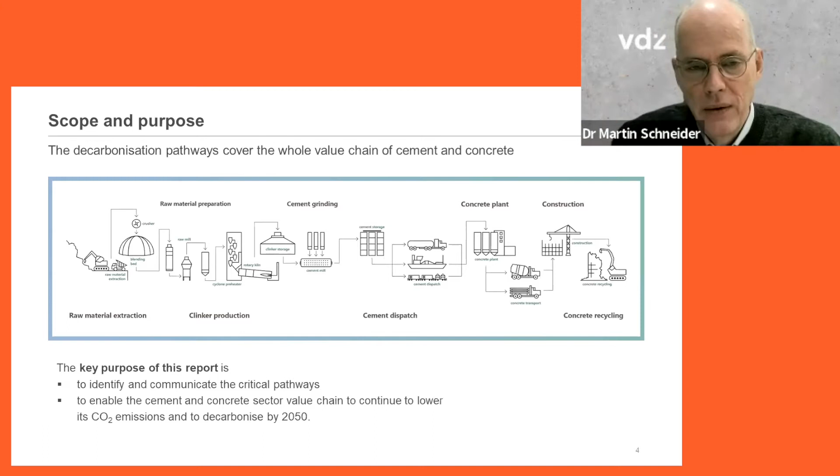Nevertheless, you might know that we have also been participants and responsible for the numerics of the global roadmap for the global cement and concrete sector. The measures are all, of course, somehow similar. But as you will see, the implementation, like in your case here in Australia, is very, very specific to your situation. That is the reason why we were assigned, or asked, to deliver this report, which of course we did with great pleasure, I have to say.

Now we have the full value chain here, and you will see that the decarbonization pathways cover the whole value chain. Of course, we start in cement and clinker production, but also the question of cement grinding, and how much clinker can be in cement in future, in order to make cements as CO2 efficient as possible. And the same is for concrete. The question is how much of the SCMs, like fly ash, slag, or limestone, or in the future calcined clay, can be in concrete to make concrete as CO2 efficient as possible.

And of course—this is, I think, a focus that SmartCrete also particularly covers—the question of how concrete can be used efficiently in construction for offices, buildings, housing, and infrastructure. And at the end, the question is how can concrete be recycled, and how in recycling, the effect of what we call recarbonization, the absorbing of CO2 by concrete, can also be taken into account. So this is the full value chain.

As I said before, it's the first time, I would say, in the history of our sector, the cement sector, that we are not able to deal with such a challenge as an industry alone. So we need to really cooperate along the value chain. And I have to say that the experience we had with the many workshops and video conferences we did, with all those involved in the value chain, really clearly showed there's a strong willingness to work together.

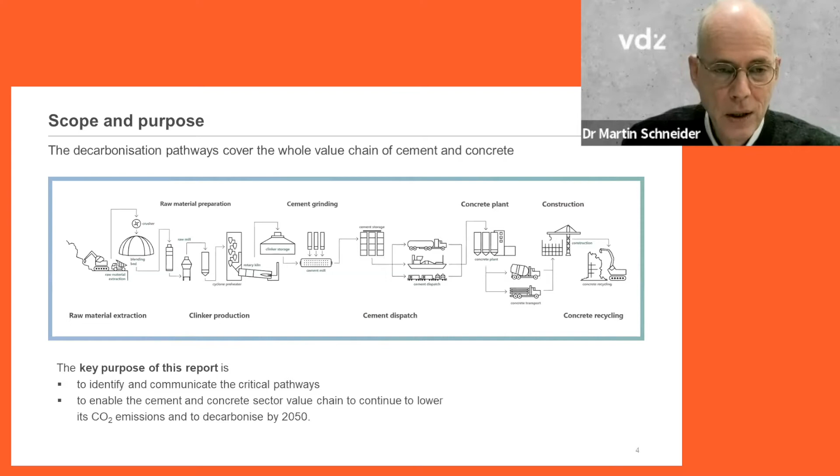And it's in our hands to make this future net zero when it comes to CO2. And you will see that it's possible once we all work together, on a global scale or in the regions where we are working.

Now let me draw your attention to the beginning of the value chain, which is cement production. Cement production is, of course, the source for the direct CO2 emissions, the embedded CO2 along the value chain.

As you all know, we have an issue in cement making which is different from many other industrial sectors, in particular different from the power sector. We need high temperatures to burn our limestone and clay into what is called clinker, and clinker is the powerhouse in cement.

Clinker is the main constituent in cement that gives strength to cement once it's hardened, and then to concrete. It's absolutely needed in cement. Now the fact is that clinker burning depends on raw materials, in particular limestone.

The recipe is fixed. There's no way to change it, for chemical reasons which are part of the mineralogy of clinker. From the limestone we have, and limestone is calcium carbonate, we have to extract the calcium oxide, and that releases CO2.

So we have two sources of CO2 from our clinker production: namely the process CO2, from the decarbonation of the limestone, and the CO2 from burning the fuels. Taking those two as such, you could roughly say it's a 2/3, 1/3 fraction.

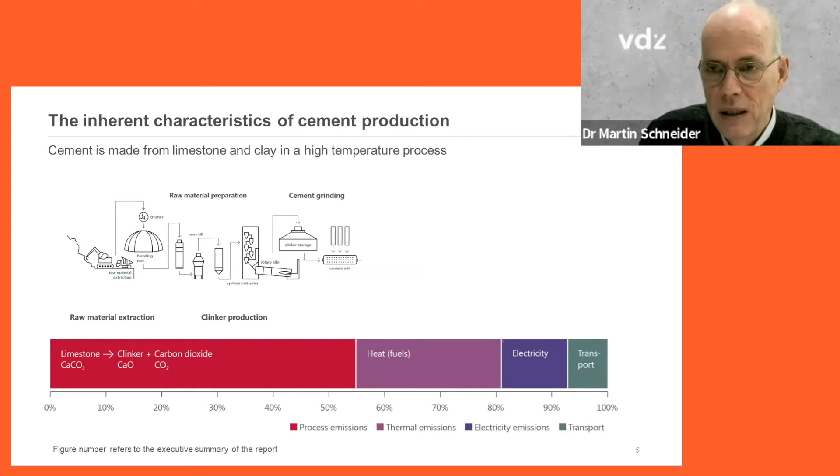Now, looking from an industry point of view, what are the key issues for success? There were very good discussions that we had here, and the question was always raised: how can we successfully transform the full value chain?

When you start from cement making and concrete making, and ask yourself what are the main levers, the main pathways, the first thing is to lower the clinker factor.

I think that's clear, based on the fact that clinker, as I said before at the very beginning of our value chain, is the origin of the direct emissions from the limestone and from the fuels. So the less clinker you have in cement, you could say the less CO2 is embedded in the subsequent part of the value chain, which is true.

On the other hand, there is always the question: how much clinker do I need in my cement? Cement without clinker is impossible. So these are two extremes, and the question is, what can be optimized?

It's not only the clinker factor in cement, but also the clinker factor in concrete. Australia has a long and very good tradition to using what we call supplementary cementitious materials, SCMs, materials that can substitute clinker.

Australia has a long track record and a very good tradition in using these SCMs in cement, but also in concrete. So the overall clinker factor, as we call it, is already quite good in the Australian cement and concrete sector. Nevertheless, there's always the question of how we can further optimize the clinker factor.

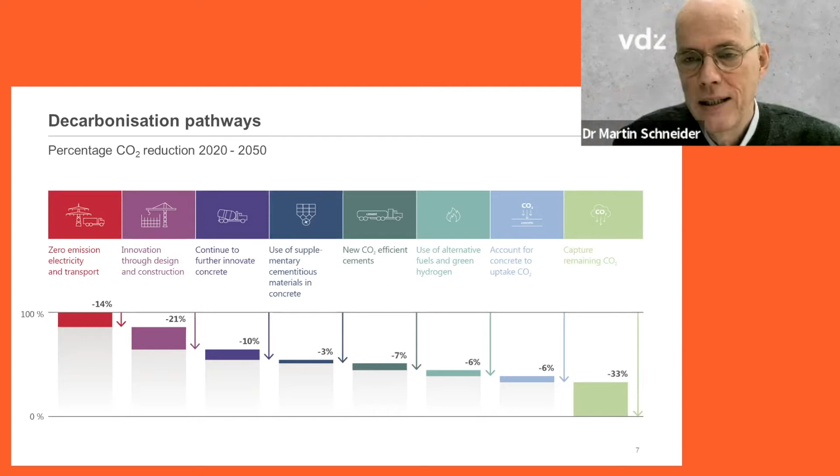But it's also the fact that concrete as such can be seen as a CO2 sink. And it was always a question to what degree concrete can absorb CO2. It's, of course, difficult - it depends on the type of concrete, it depends on its specific surface, and so on.

And it's interesting to see that quite a few research projects have been concluded, and even the IPCC, the Intergovernmental Panel on Climate Change under the United Nations framework, has addressed this. A substantial part of the original CO2 being emitted from the decarbonation of the limestone is reabsorbed at a later stage. And we might even - this is one of the innovation areas we suggest - be able to accelerate this, to enhance this recarbonation.

The question, of course, is how can that be taken into account when describing the CO2 from the overall value chain. Now, we have accounted here 20% of the original CO2 emission from the process, which is in agreement with the international approach on this pathway. Now, the remaining CO2 - and there will be remaining CO2 - the value chain will not be able to fully reach net zero by 2050 with the measures and pathways I've just described.

There is still the need to capture the remaining CO2. That means to capture the CO2 at the point of emission, at the stack of the cement plant. Then the question is what to do with the CO2. First, of course, you can store it - bring it back into depleted oil wells and gas fields. There's a long tradition also in your country, in the oil and gas sector - it's proven technology. The other thing is, is there anything we can do with the CO2 to reconvert it into something useful? We call it CCU, carbon capture and utilization.

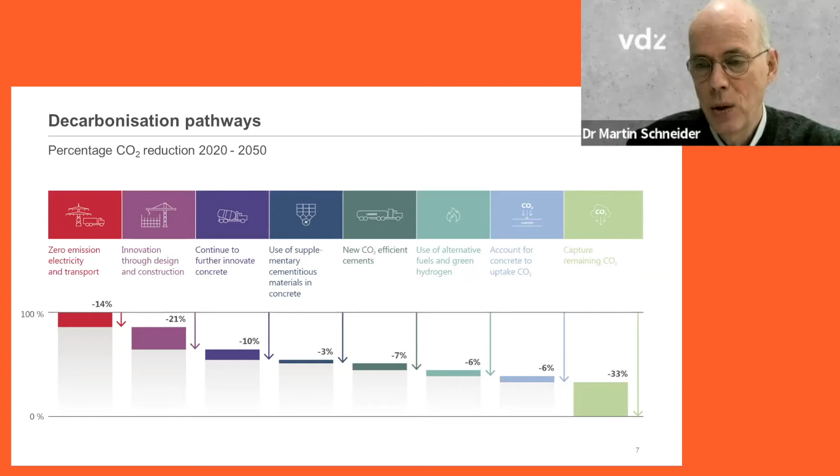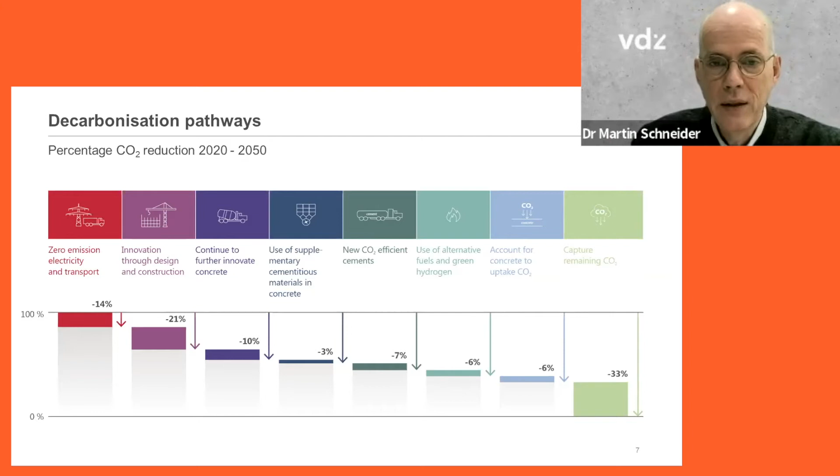As you may know, CO2 is a very stable molecule because it has released all its energy, as it's the end product of combustion, for example. So in order to make something useful out of it, you have to re-inject energy, you have to give energy back to it. And that, of course, has to be CO2-free energy.

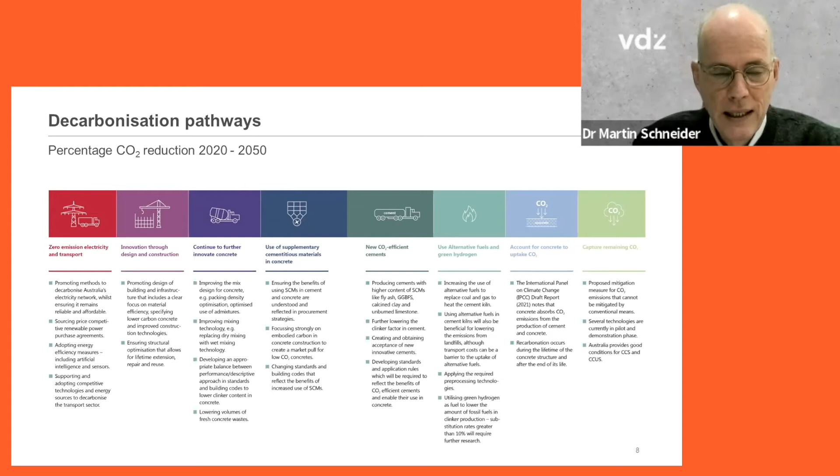This slide is not one I'm going to explain in detail, but it's a figure from the report which clearly shows that under each of these pathways there's a set of measures that has been suggested by you in the various workshops we've been putting together here. Now it's on you to ask yourselves what are the measures and to what degree can we implement them.

When you set up a full engagement plan for the whole value chain in Australia, having said this, I'll hand over to Christoph to give a few thoughts on the innovations for design and construction, which is basically the concrete part. I've understood that most of you in the audience have a strong focus on concrete and its application in construction, and as participants at universities you might also be interested in this. Christoph, I hand over to you please.

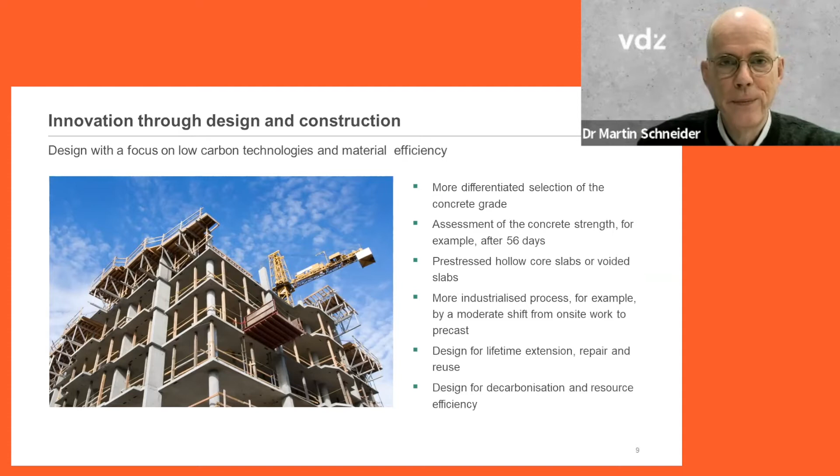Yes, thank you Martin. And also from my side, good afternoon everybody. Yes, indeed.

Designers and architects play a crucial role in the design and construction process. They can make very strong decisions at the beginning of a project that contribute to decarbonization and resource efficiency, and they can also take decisions that do not contribute to decarbonization and resource efficiency. Therefore we have highlighted that early in the process they are in a role to take the first decisions.

They can take decisions with regard to the design and construction of the building. We have seen, within the discussion for all the levers and measures along the value chain, that there are always low-hanging fruits which can be taken into consideration in daily business immediately, and there are other things that have to be developed in the coming years. For all the things which have to be developed, we made some proposals for innovation areas, for research and development.

So when we start with the low-hanging fruits, the things that can already be taken into consideration, of course a designer can try to avoid over-dimensioning of components. It came up in discussion with your experts - and I assume this is not only the case in Australia - that for the sake of simplicity we sometimes use the same concrete for certain types of components in one building, when it's not necessary to have such a high quality or grade of concrete. So a more differentiated selection of the concrete grade is a very simple option that can be taken already today.

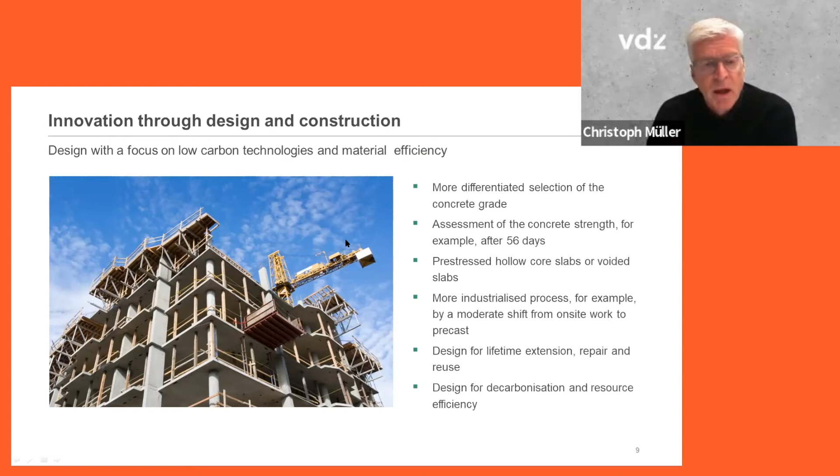The same applies more or less with regard to concrete technology. Also there, you as concrete specialists know about the option of packing density optimization and optimization of aggregate grading. The question is, do we always today in daily business use these potentials as much as possible in lowering the binder content in the concrete? And I would assume that in daily business the answer is not always.

So we can be better also in this field. The experts of the Australian concrete sector reported that sometimes there is still potential in a better forecast on the demand of concrete and the adaptation of truck sizes. There seemed to be some potential with regard to a change from dry mix plants to wet mix plants, which is of course not something that can be done just tomorrow, but that might be a point of discussion for your implementation plan in Australia in the coming months and years.

A further topic, discussed not only in Australia but all over the world and in many committees dealing with concrete, is always a question of the descriptive approach versus the performance approach. Sometimes there seems to be a contradiction. I think this is not the case. Also, a concrete which is made under the descriptive approach, of course, has a certain performance. But sometimes description makes a system not really flexible. And what will be important in the future is to have an appropriate balance between these two approaches. It has to be discussed, what is the performance we need for a certain application?

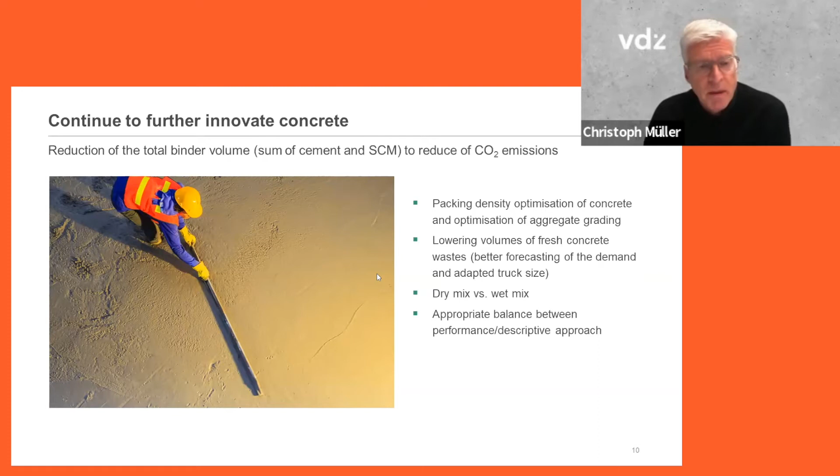So when we come to the next slide, this is the use of SCMs in concrete. Martin already mentioned this. This is a lever and a measure which has already a long tradition in Australia, as well as in other countries. We have a good tradition in using GGBFS and also fly ash.

And Martin already mentioned that the steel sector will also have to decarbonize. So the question is to what extent GGBFS will be available in the future. In our report, we assumed that the amounts as they are today will still be available also in the future.

With regard to fly ash, we've learned that a lot of stockpile fly ash is available in Australia. Of course, it's not all available as such. Most of it might need processing, especially the ponded one, which might have a high chloride content, and therefore we proposed a research area for that.

Then the limestone, which is the basic material for clinker production, it can also be used in an unburned condition. Of course, it has its technical limitations, but we know also from our own research that there are still potentials which are not used today. And calcined clay, also available in sufficient quantities in Australia.

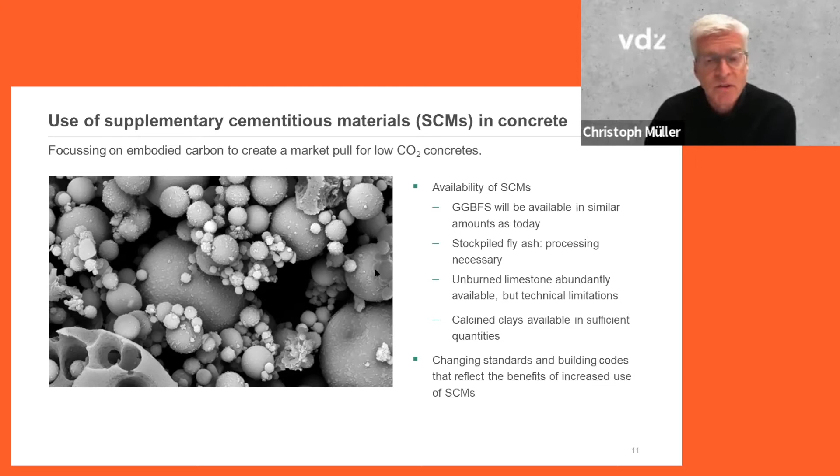You see them on the next slide. We are quite confident that it will be possible and should be possible to use cements with a higher limestone content than you have it today for certain applications, especially for applications where mainly strength is the main performance criteria. So for a lot of concrete used for indoor components, it's mainly strength and good fresh concrete properties. So if carbonation is not an issue, if freeze-thaw is not an issue, if chloride is not an issue, for sure you can use cements with a higher limestone content.

If you need a better performance also with regard to the durability of the concrete, you can combine the materials. You can combine, for example, limestone with calcined clay. A very prominent project, well known all over the world, is the LC3 project with clinker content of 50%, and then, for example, 30% calcined clay and 20% limestone. But we are quite confident that it's also possible to go even lower with the clinker content.

And here in Europe, we had the discussion, and we will have also a new cement standard taking into consideration such cements, with, for example, up to 45% of fly ash, calcined clay, or GGBS, together with 20% limestone.

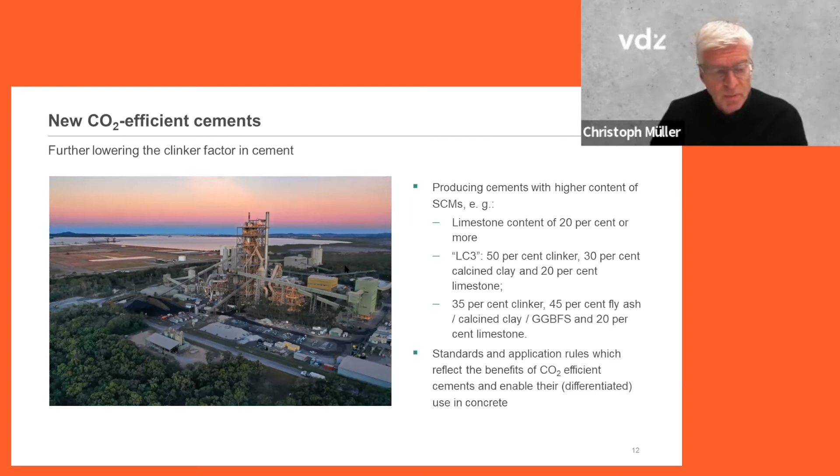So those were some examples from these pathways along the value chain. And I think now we have to come to the question, what are the prerequisites for a successful decarbonization, Martin?

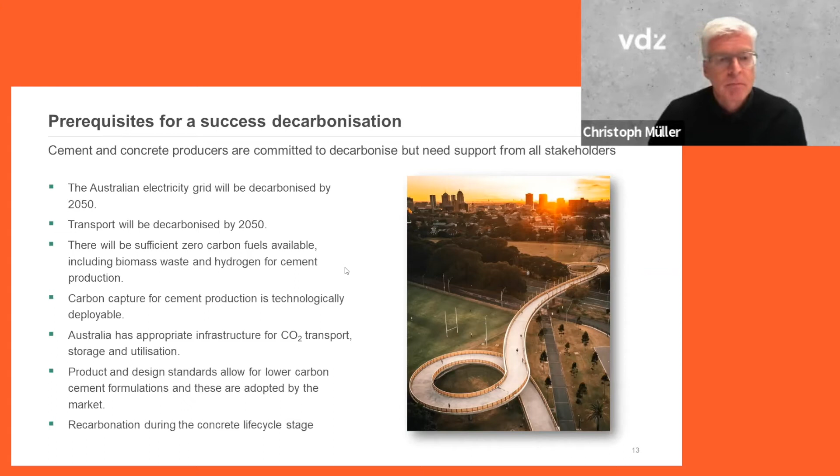Martin? I'm sorry, I have to unmute here.

Okay, there are indeed a couple of measures which are needed to make this transition happen. We have heard so far about the various pathways, but even in the Q&As it becomes clear that it's not just happening because we want it or because the technology is there. No, that needs some framework, and it's a framework that I think we all have to work together with.

Then, of course, there are also some things which are not really under our control, like the electricity grid, that has to be decarbonized by 2050. But it's great to see that some of the cement producers are already now trying to source electricity with a lower CO2 emission per megawatt hour as compared to the average.

Yeah, the same applies to the decarbonization of transport. That's something that's not really under our control - when I say our control, I mean the industry's control here. But on the other hand, of course, it's a push and pull. If we ask for this, if we source this, I think it's also a bit chicken and egg - if somebody asks for this, a development will also take place.

And I think that the construction sector can be a facilitator when it comes to electricity and transport. But also when it comes to the CO2 from our fuels, there must be sufficient zero carbon fuels available, in particular biomass and hydrogen.

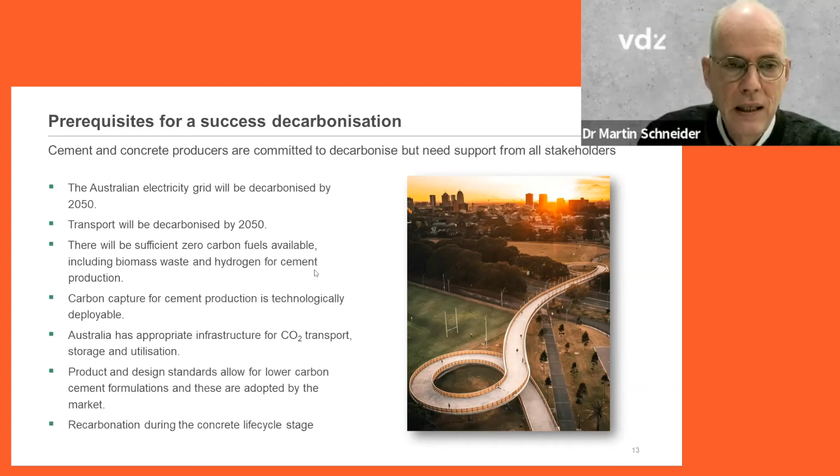Again, a very valid point. But my feeling is, if the whole value chain is really willing to accelerate standardization, and to make sure it's well supported by good research results, standardization can also be faster than what we are used to time-wise. Last point here: recarbonation during the concrete life cycle stage really has to be taken into account. It's not only a balancing factor for CO2, but I think we can take advantage of this natural recarbonation of concrete, and to some degree find solutions to enhance it actively.

Now, we've been asked not only to put these pathways together, but also how the Australian cement and concrete sector, together with the whole supply chain and academia, can address specific items, and there's always need for research. We've come up with these innovation areas that are fully described in the report. We don't have time to go into the details here, but since you are from the value chain and academia, I'd like to address the ones that specifically go for concrete, and Christoph will highlight them.

The great situation we could sense in Australia is that you have excellent research infrastructure. There's strong and good cooperation in the CRCs, within the sector, but also with all those downstream in the value chain, and in particular with universities in the academic world. So I think that's something you can build on.

We believe research has two aspects. First of all, you come to good results that facilitate a certain process. But the other thing is you work together on something—that means transformative research happens. Building on the tradition you have in research in Australia, I think that's an excellent starting point to also address those areas.

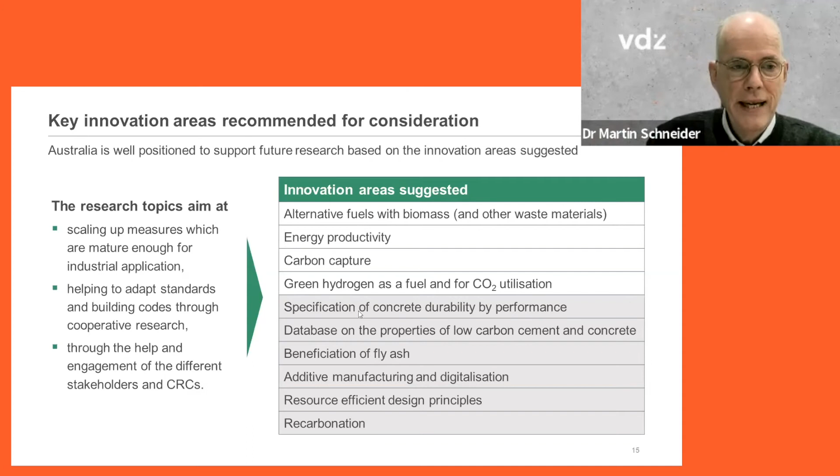This is a suggestion from our side, and it's up to you now to implement this and also to talk to funding organizations to make sure you have sufficient funds to go through this. Christoph, I hand over to you to explain the ones I've highlighted here.

Yes, just a few details with regard to the six innovation areas which have been suggested with regard to the supply chain here. I saw in the Q&A and chat that there's a question on how to come forward, how to deal with the performance approach. And this is a good question.

From my experience, one of the crucial things is that when several cement, concrete and construction people are in one room talking about performance, they sometimes have totally different things in mind. So the first thing is you have to define what performance means for certain applications, which might seem trivial, but sometimes it's a very important thing.

And then the next thing is that, of course, you have lab performance on one hand, especially when it comes to durability, and performance in the building on the other hand. Therefore, the proposal is that you really should start with all the stakeholders together in joint research to come to a clearer picture of the correlation between lab performance and performance in the building. Then you can end up with a kind of performance approach that all the stakeholders together are happy with.

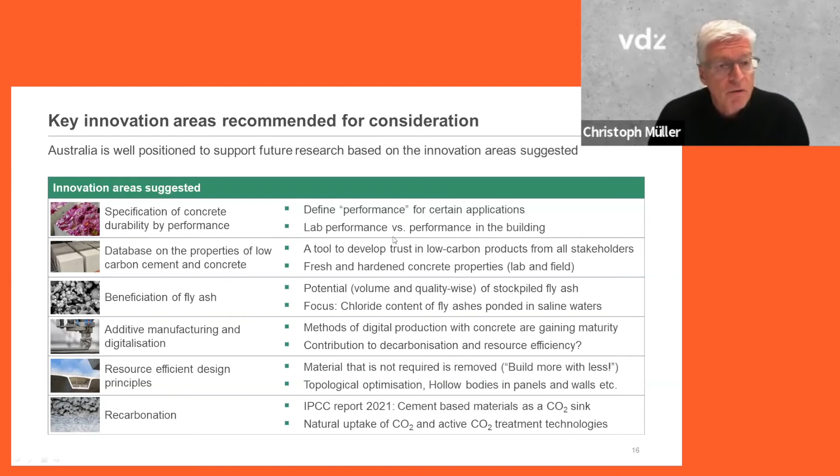Now we are more than happy to discuss with you and answer your questions. Thank you.

Thank you, Christoph and Martin. Zoe, we have a lot of questions that have been put through — can I ask you to just start going through them? We've got quite a few, I'm not even sure we'll get through them all, but I'll defer to you on that. Thanks, Zoe. Absolutely, thank you, Matt. I think there's a wide range of questions, so I'll probably focus on a lot of the panelists, and I may hop around and just ask a few of the questions. But I think the first question that actually popped up was by Craig.

Process emissions from the conversion of calcium carbonate is well understood. Did the report also consider the use of pre-calcined material feedstock, and various SCMs for clinker manufacture? This could be an area for reductions. I wonder, Martin, if you're the right one to assist us with that question.